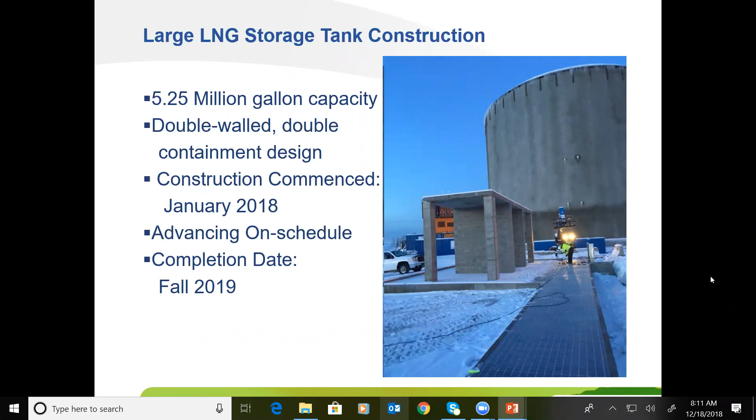Right now we have the schedule—the design called for the outer tank to be completed in the summer construction season, with the dome roof to be placed. We are now a week or a few days ahead of schedule. About a month ago we were about a week behind schedule. So right now we're back on schedule, and before the crews break for Christmas on December 20th and 21st, they will be a week ahead of schedule with their work.

What they're doing now is the outer tank has become our shop—they can work all winter long. They have heat inside the tank; two large electric heaters are providing enough heat. The tank has generally been staying about 50 to 55 degrees, which is perfectly comfortable for the activities going on, a lot of preheating and welding.

The inner tank you see here now is the rows of steel, and this is 9% nickel steel—the low-temp alloy that can withstand the cryogenic temperatures. This is the component of the tank that contains the liquid. By the time they leave on Friday, you can see three rows of steel up here that will be on their 5th row. The 5th row will be placed, though I'm not sure if it will be fully welded out before they leave. Not quite fully welded out, but it'll be in place, tacked, and partially welded.

They've got some catch-up work to do on their testing—the X-ray technicians are having a hard time keeping up with the welders. Each one of these welds gets 100% X-ray inspection in this tank.

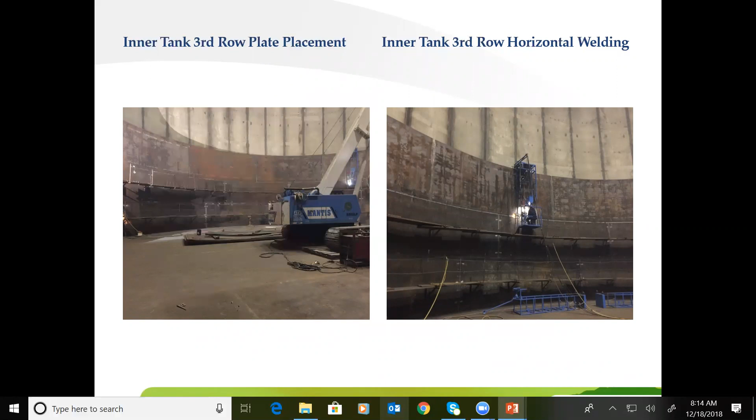Are they natural gas? They're natural gas boilers, high-efficiency condensing units, so we use the highest efficiency possible units we can get - they're at 95%. They'll send warm glycol to the vaporizers, and that warm glycol gets circulated back and reheated. In addition to the heat for the vaporizers, under the trenches we have heating so we can keep snow and ice outside.

One of the code requirements for spill containment is that it can be snow and ice free.

In addition to the Fairbanks storage facility, we're working on the North Pole storage in order to begin providing service to North Pole. The 2 systems aren't connected yet, so North Pole requires its own storage facility. In addition to needing the storage, we need that feed from that direction of our system to provide pressure support.

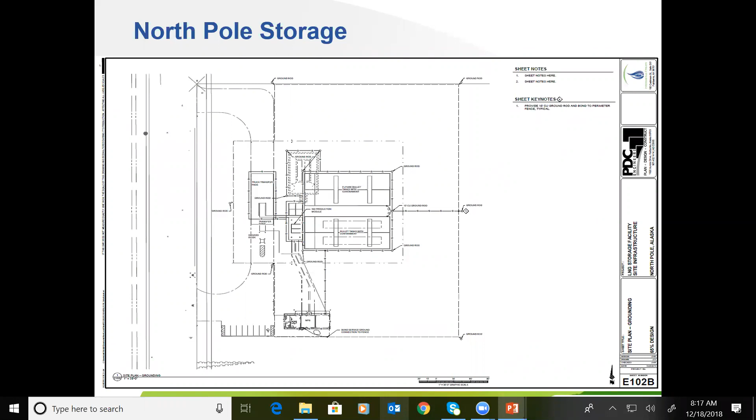This will give you an idea of what this facility will look like.

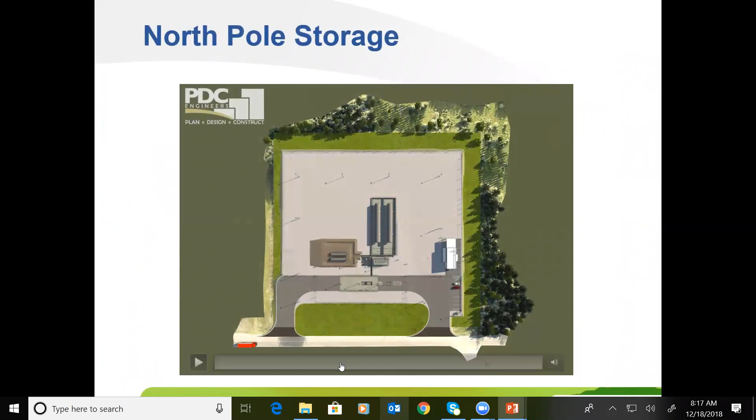We'll also have the space available so that, should Golden Valley decide, we can add a larger storage tank.

No, it's breaking up like that. Special effects - computer's not keeping up.

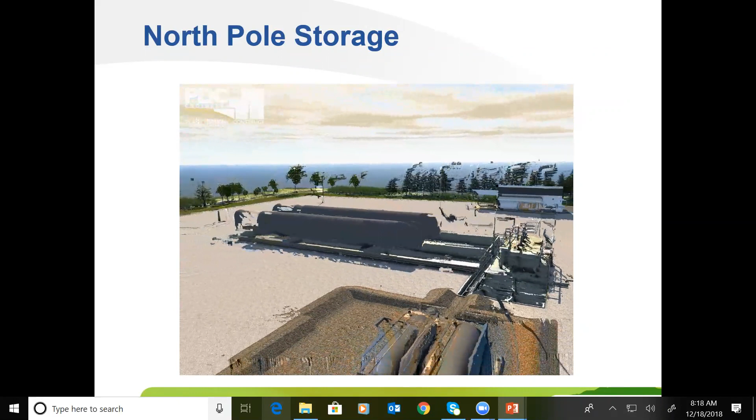So you see similar components: the vaporizer skid in the front, the large tank - our tanks there are shop-built tanks. You can see the temporary tanks, which will be ISO containers right in front of us there. In the background, we've got our multi-purpose building for this facility. You can see the truck lane where the trucks will come in to offload and exit.

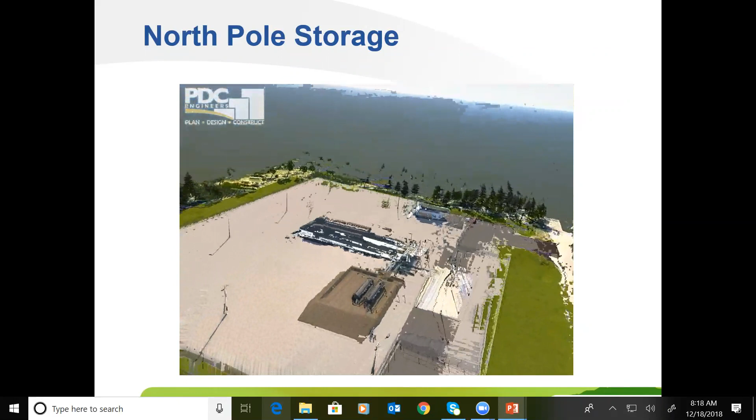Where does all that ocean out there come from? I was wondering about that too. Palm trees - we've got to add that. Yeah, no hill for a climber. Yeah.

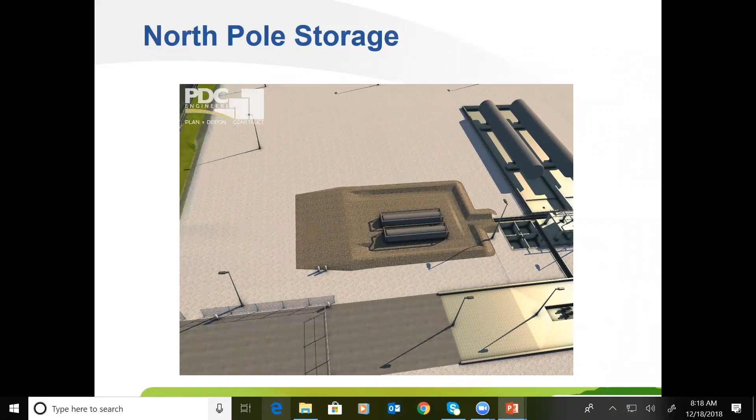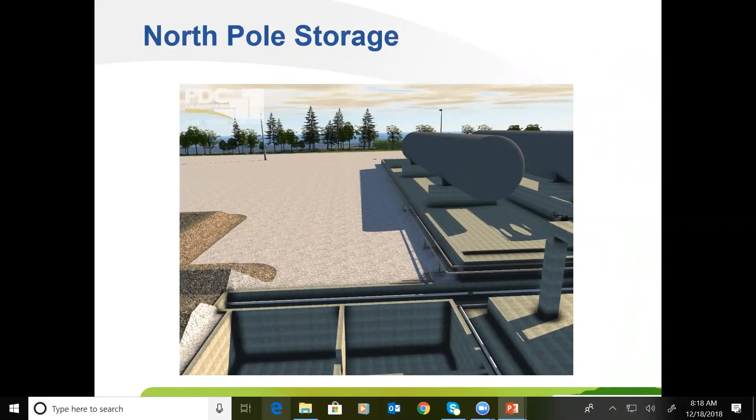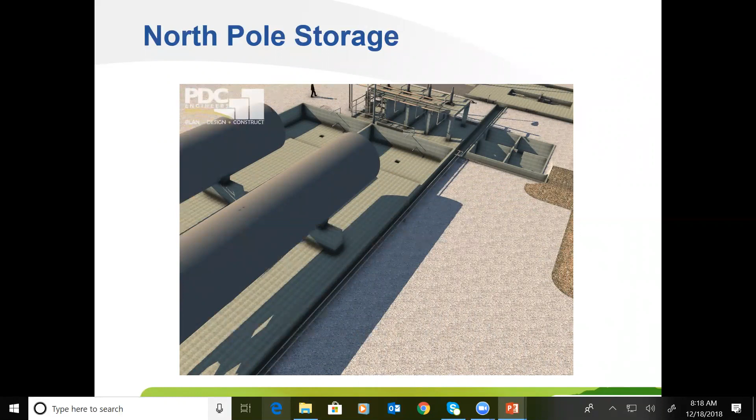So we'll be bringing this forward to the Interior Gas Utility Board for a final investment decision in early January. As soon as we receive that decision, we will bid the work and look for construction in the spring and summer of 2019, with completion in the fall of 2019. At that point, we'll begin to add customers in North Pole as well as the Fairbanks area.

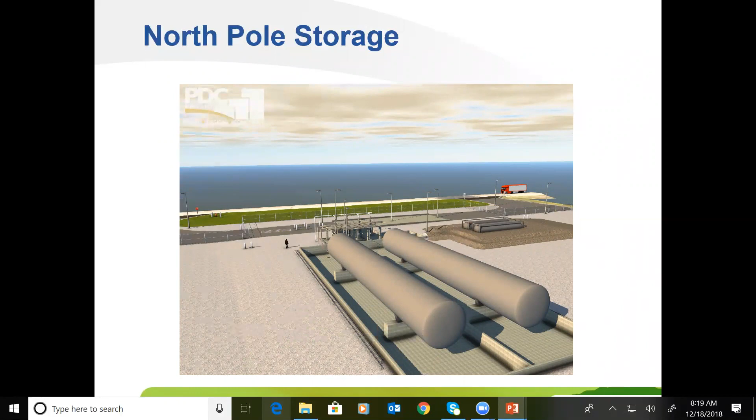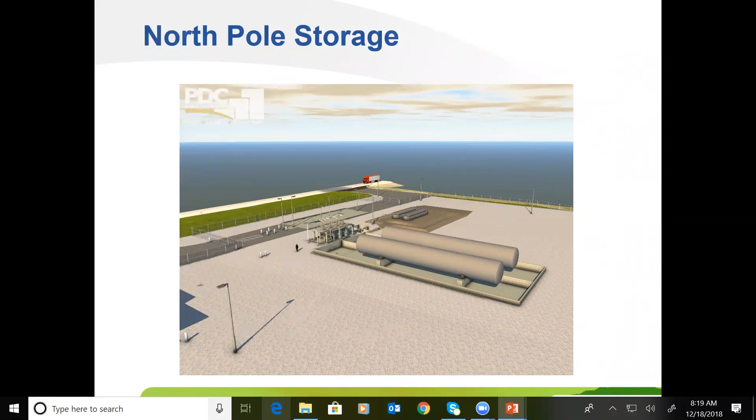We've left space for the addition of 2 more of the 75,000-gallon tanks. That's what you see right there. And also space for a large field-erected tank, similar to Tri Road but probably much smaller, in the event Golden Valley, when they choose to use natural gas, wants to have additional storage capacity. If they use natural gas in their LM6000 turbine in North Pole, if they run it at full capacity...

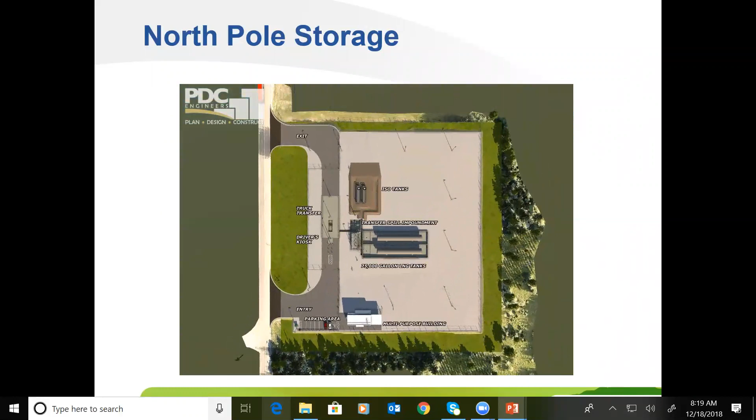What's the ratio, standard ratio on storage, say for Golden Valley? It's really customer driven. Golden Valley has alternatives - they have their LNG truck, they could switch to a liquid fuel. So it comes down to preference. The more alternatives they have, the less storage you generally will install. Given they have alternatives, not only for that particular unit, but also different alternatives for generation in their system, they may choose not to install.

Remind us then, for the resident customer, this storage translates to what? This storage is designed to be able to serve the full capacity. We have the ability to add additional boilers and vaporization capacity to be able to build out. This is not designed to be the security of supply for the system.

Security of supply will come from a 5.25 million gallon tank. So in the beginning years, this 150,000 gallons gives us 5 days of capacity. Over time, it'll be less than 5 days, with the fine tank in Fairbanks. So, yeah, we've got the capacity necessary for security.

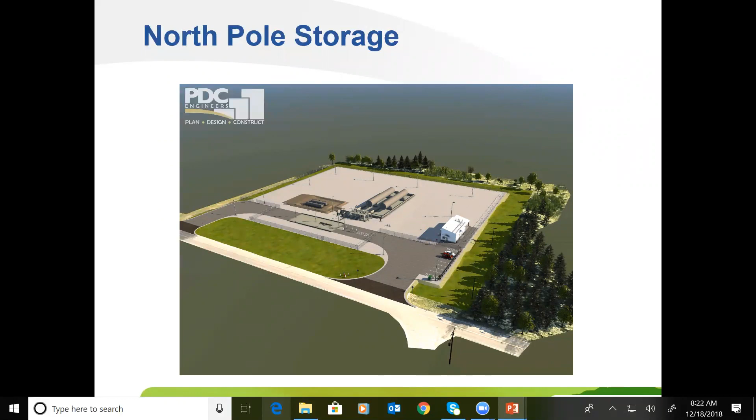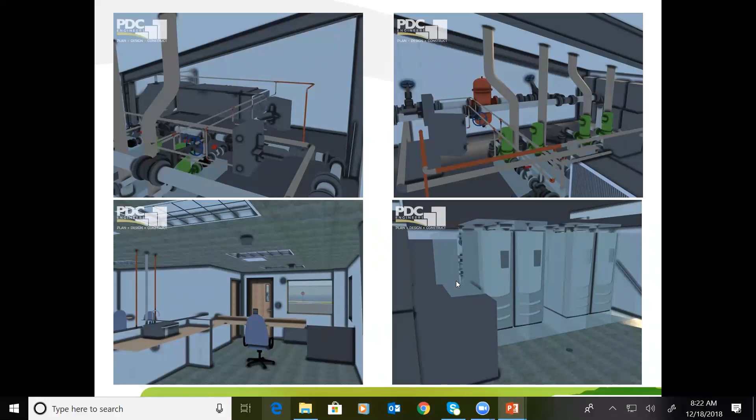Any questions on our North Pole facility? Just a few shots of the inside of what the boiler rooms are likely to look like. These will be multiple boilers, again at the full 95% efficiency. Same security of supply in our vaporization here - we've got multiple boilers and multiple vaporizers so that we can maintain the gas delivery that we need to maintain.

I got a question on the North Pole facility. Will it be filled off the 5 million gallon tank in town, or will it be independent? It sounds like a long range question - would that entail a line between them? So the general operation will be for LNG to be delivered directly to North Pole. We won't do any storage facility deliveries. The only reason we'd do that is if we had a disruption in supply where we couldn't get LNG from Point MacKenzie to Fairbanks for some reason, we would then transport from the large storage tank.

Generally, we would just deliver LNG as we have, which is the thing we do. That's backup. Usually it would just receive the delivery. Ultimately, the two systems will be connected by pipe.

Each one of these storage facilities will be at some point... Yeah, everything outside of the storage facilities, once it leaves the storage facilities, we become a conventional gas utility at that point. We need to store and vaporize the LNG. At that point, it goes into our piping network as molecules.

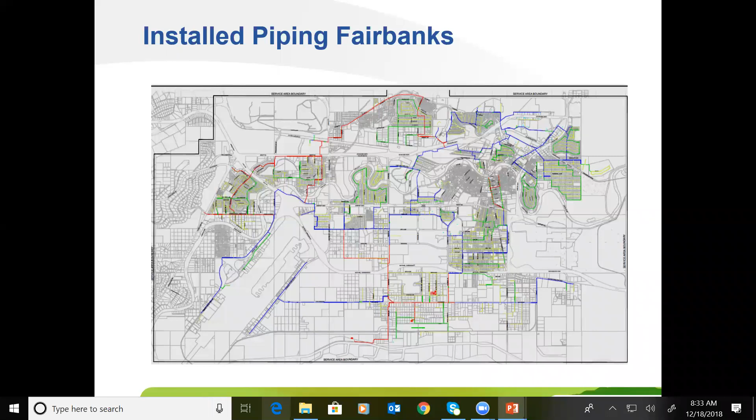Anywhere, how far from those lines? Just 100 feet? Generally, if there's a main line in front of a home or a business, whether it's 100 feet or 200 feet or 300 feet away, we can install a service. Most homes will be within that 100 feet generally, but there are some larger properties that have longer service lines. There's no set restriction on distance from the main line. You require a 500-foot service line, that's sized accordingly.

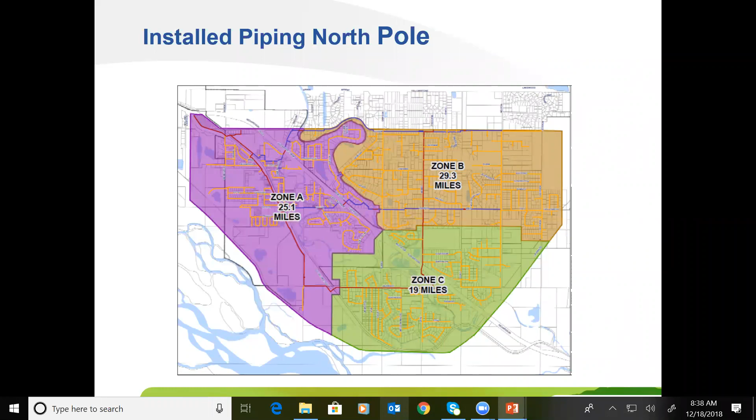What's next? One thing of extreme importance to us is the security of our system and avoiding damage. So a reminder, if you're doing any work in your yard, or as your contractor, please call 811 before you dig. We provide free locate services anywhere in our system, in addition to some utilities.

So what's next? One of the prime things that's next for us is a decision on the liquefaction expansion. Storage allows us to add customers, but in order to continue our growth and demand expansion, we need additional liquefaction capacity from somewhere.

Two alternatives are being considered right now by the board. One is a utility-developed project, expanding our existing facility. In Point MacKenzie, we have a liquefaction plant that produces approximately 50,000 gallons a day now. We've looked at expanding that facility over the years. Initially we were looking at adding a 100,000 gallon a day liquefier to that plant, and now the board wants security of supply. That's the sweet spot we're trying to find right now. Our single largest unit alone would not create that security.